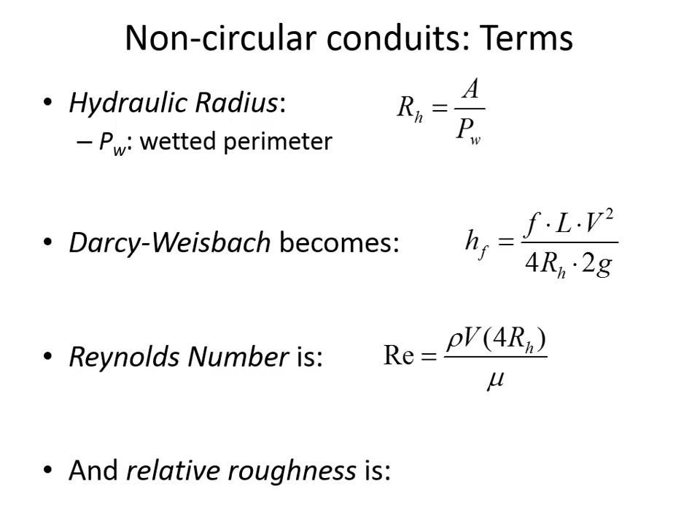Yeah? Yeah, it is. The cross-sectional area in the case of the pipe would just be whatever length and width you've got, or in the case of an irregular cross-section like this, you'd maybe need to make an estimate based on the shape. Usually on an elliptical pipe culvert like this, you can get many of the geometric parameters directly from the manufacturer. They'll tell you what the cross-sectional area is, and sometimes even the wetted perimeter for certain depths. Those pipes like that will flow.

Yeah. The clue that they think it's going to flow full, you can't see it, but they've got chain link up against the gravel here. They're fully prepared for the water to actually go over the top of the road there. And so it's at a pretty shallow angle, and they've got big cobbles there with chain link over it so that when the water comes flowing down through the wadi, as they call it.

Now out west they have canyons. Here in West Virginia we have hollers. There they've got wadis, they're called. And in fact the water park there is called Wild Wadi. So the idea being the water slide is like you're going down one of these wadis.

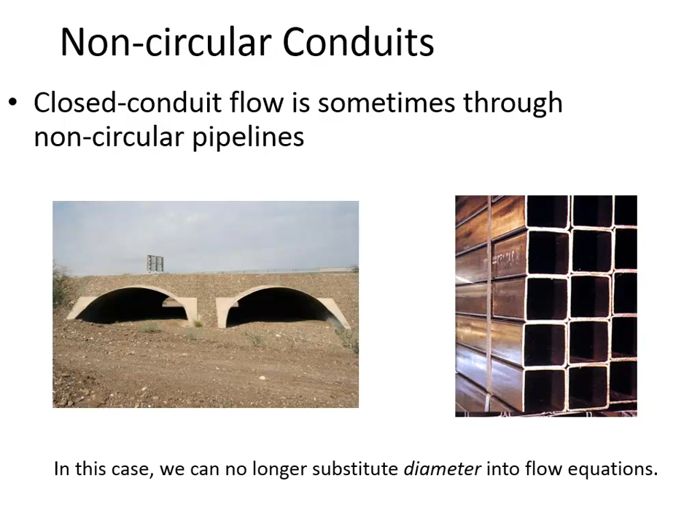But yeah, so they've got chain link all the way against the face of that to try and keep everything in place. Well, if the water came rushing towards that, it could erode it if it was just soil, or if the rocks weren't held into place. It's just a way for them to keep the rocks that are up against the face of that in place when the water is coming through. Yeah, out in the middle of the desert.

Okay, so let's take a look at an example just so we can get a feel for doing the calculations when we have a non-circular pipe. We have a rectangular box culvert here, 12 meters long, and we know the equivalent sand roughness for this concrete box culvert is 1.6 millimeters. We know the width and the height of the box, and then the flow rate is 0.4 cubic meters per second. So if we assume that it's flowing full, we want to find the head loss according to the Darcy-Weisbach equation here.

We're just going to make the substitutions for the hydraulic radius being put in place where ordinarily we do the diameter, and doing the same thing here, you'll notice that instead of diameter we have 4 times the hydraulic radius in the Jain equation as well. So for a non-circular pipe, length is 12 meters, ks is 1.6 millimeters.

For which equation? What's the culvert equation? Oh, Colebrook equation. I thought you were saying culvert equation, because we were just looking at a picture of a culvert. I was still in culvert mode. Yes. Yeah, that's right. Okay, so for a second there you were getting worried when I said, what's the Colebrook equation, right? Yeah. No. I remember what the Colebrook equation is.

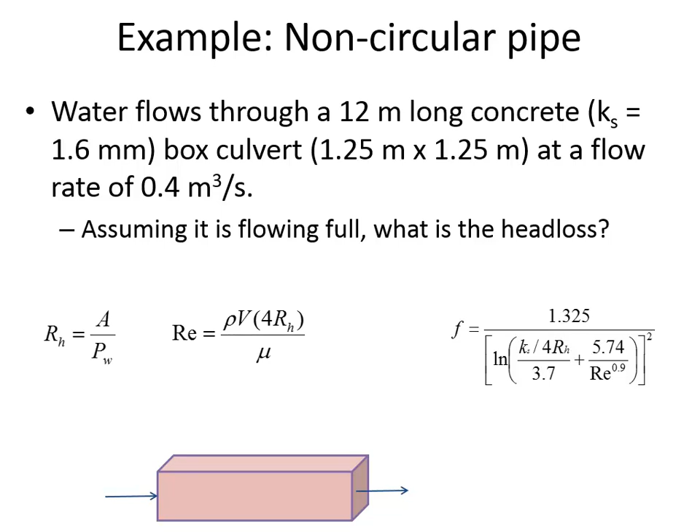All right. Speak of the devil, there it is. Local losses are sometimes referred to as minor losses because ordinarily they only account for a small fraction of the head that's being lost from one point to another. The pipe friction is usually dominating the energy losses, but that's not always the case.

You'll notice that in order to calculate the local losses, H naught, there will be some K factor. We can look it up off of a table or it will be given, and that's an indicator of how much turbulence is induced by a given fitting. Whether it's a globe valve or a gate valve, each of these valve types has a different K value that you can look up. And even from manufacturer to manufacturer, the K value may be slightly different. You look up the K value and then multiply it by the velocity head.

The velocity that you use is the velocity as the water goes into the fitting. In most cases, the velocity will be the same inlet to outlet because the diameter into a valve isn't any different from the diameter out. But if you have a pipe diameter that is changing, you have the flow in with one velocity and the flow out with another. The K value is typically calibrated based on V1 dominating the amount of energy loss. Sometimes you'll just use the inlet velocity through a change in diameter.

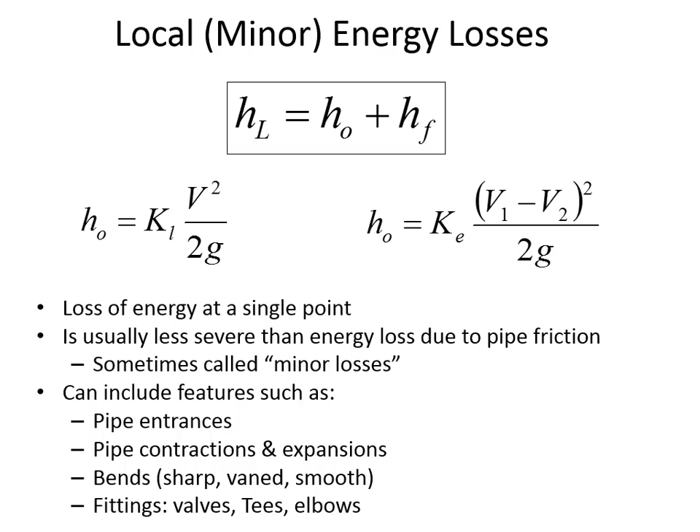Anytime flow changes direction because of a bend, that can induce turbulence, and so can all of the fittings and valves that exist typically in a home. A spigot may have a T junction because you want a pipe going off to the garage, or a valve which splits the water into the hot water heater and a separate cold water line. Each one of those takes a little bit of pressure out of your system, because if the diameter can't change and the elevation is constant, head loss manifests itself as a reduction in pressure from the upstream end of the fitting to the downstream end.

I guess you could have a long pipe network. You could have a bunch of exits. That's right. Yeah, you could have more than one. Okay.

You've got to lift water to a really high tank to get that pressure, or you're burning up electricity in a pump to generate pressure. And so pressure is this precious resource that you want to preserve so that people can have a blasting shower at home, right? People always complain about too little pressure, but they rarely complain about too much. They can just turn the valve a little bit more closed.

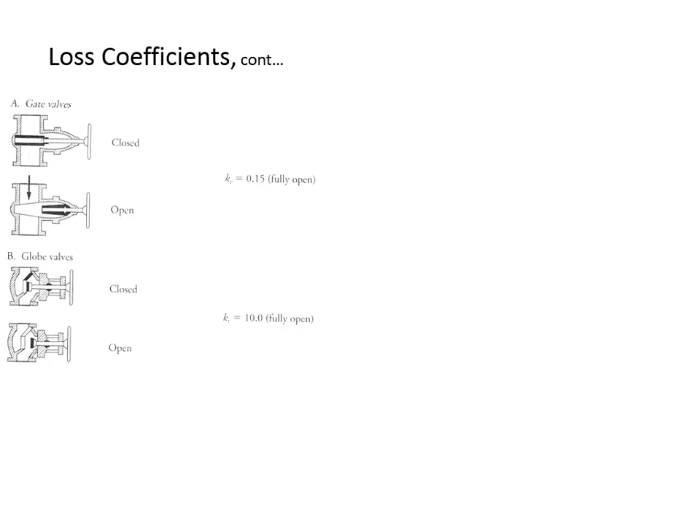Okay, here's what some of these valves look like. A gate valve is a pipe that a gate can go through, so when it's open, there's very little to disrupt the flow. I've got a better cross-section of what a globe valve looks like, but in contrast to the gate where water is just coming through without changing direction when it's open, that's the advantage of the gate. That's why the gate valve has such a low K value. A globe valve has a very unusual path. It's going to have to come in, change direction here, change direction again, go sideways, and then exit. It's changing direction like 4 times in the flow path just through the fitting.

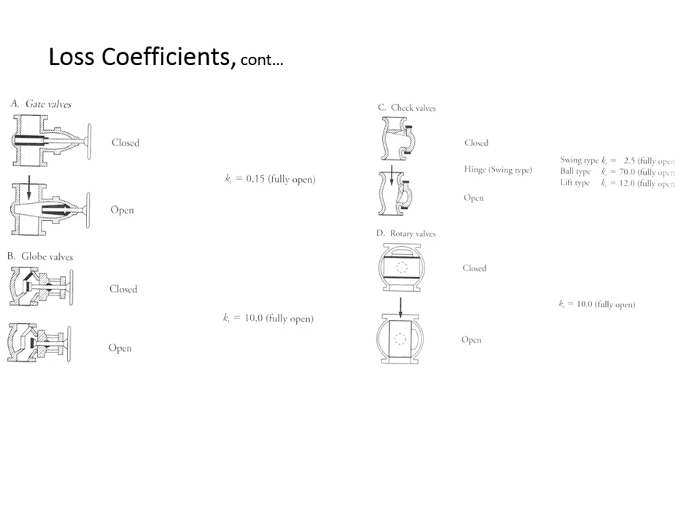So like with the globe valve, what would be its advantage? They're good for really high pressure applications. With a gate, water might leak around the edge, but you can really clamp down with a lot of force on the globe valve. So I think it depends on maybe an industrial application where you're going to have super high pressure that you'd want to use a globe valve. Like gas. Exactly, yeah. Or when any sort of leakage could be really problematic. When the propane's off, you want it off. A drip here or there from a water line isn't so bad, but it could cause an explosion if it was a gas line.

That professor that was trying out for a job? I may have missed that one. Yeah.

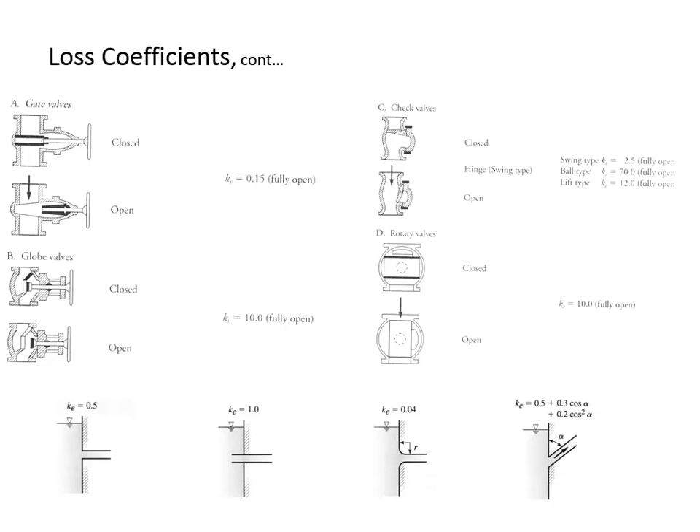The way that it works is there's a spring that's always sort of trying to push itself closed. And so the spring is pushing it so that maybe it's part way intruding into the flow because it's trying to always push itself closed, and I think it has to do with that. Ball type has like a ball that's actually floating. The ball type check valve? Yeah.